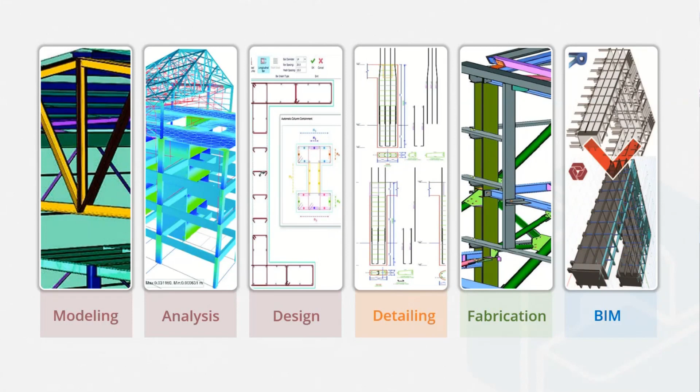So this is our ProtaStructure Enterprise Suite made up of 4 components. On the top left corner, we have ProtaStructure, which is the core system for modeling, analysis, and design of your structures. It is also complemented with ProtaDetails. Once you do your modeling, you can move on to your details part, which is a complete CAD system for automated detailing and drawings. It focuses on concrete detailing and includes a unique design library of calculations for designing things like retaining walls and piles.

And then we've got ProtaSteel, which focuses on steel. It complements your steel design by automating all the steelwork connection design, providing comprehensive steel detailing and automated connection design of your structures. With ProtaSteel, you can also do calculation reports, and it provides your drawings as well. With ProtaBIM, finally, we allow team members to connect with other tools and systems to collaborate better with other members that take part in your project. ProtaBIM allows you to communicate with other BIM platforms and software solutions like Allplan through IFC or ArchiCAD through SAF. You can even send analytical data with SAP and ETABS.

So this is Prota software with numbers, basically. And we've been expanding our reach quite a lot. If you've been joining our previous presentations, you might notice these numbers continuously going up. So we currently stand with having 25 international design codes, and we currently support 10 languages such as Polish, Spanish, Portuguese, Thai, and English.

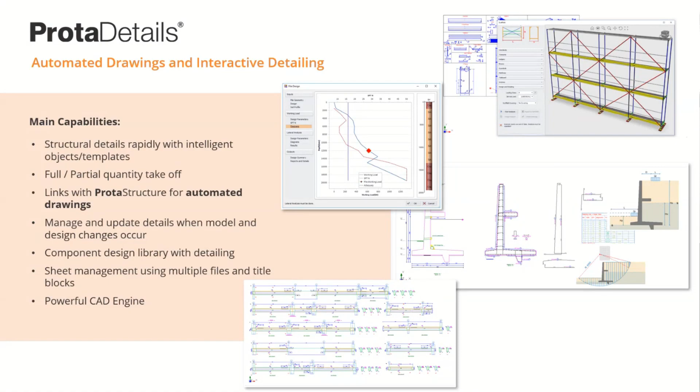Onto ProtaSteel. It is our all-in-one steel detailing solution that allows structural engineers and detailers to perform automated steel connection design and produce high-quality steel detail drawings in just a few minutes. You can take models designed in ProtaStructure and put them directly into ProtaSteel and save hours with automated design of a comprehensive range of bolted, welded steel connections of your choice. Again, we'll get to see that live very soon.

And lastly, ProtaBIM allows engineers to easily create, communicate, and coordinate models with other project stakeholders, including architects, fabricators, BIM specialists, and project owners. Using our own ProtaHub technology, you can easily create models from a range of data formats such as 2D and 3D DXF, IFC, SAF, and Autodesk Revit, as I mentioned before.

Now, you're seeing the ProtaStructure Enterprise Suite on the screen. Overall, if we are to have a recap, the ProtaStructure Suite is developed with BIM in mind. And you should remember that all these solutions are offered in a single economical suite called the ProtaStructure Enterprise Package. We of course have other packages which you can gain further information on through contacting the global sales team, which I'm a member of. But this represents that enterprise package.

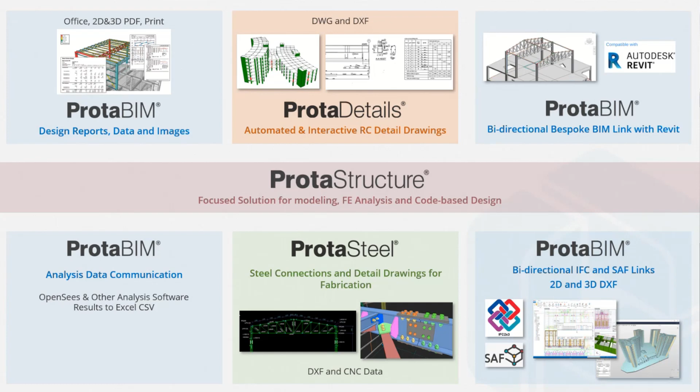You can also transfer and compare your analytical models with other general purpose analysis software, such as ETABS, SAP 2000, OpenSees. And lastly, you can also create and share highly visual calculation reports featuring Microsoft Office and PDF export capabilities.

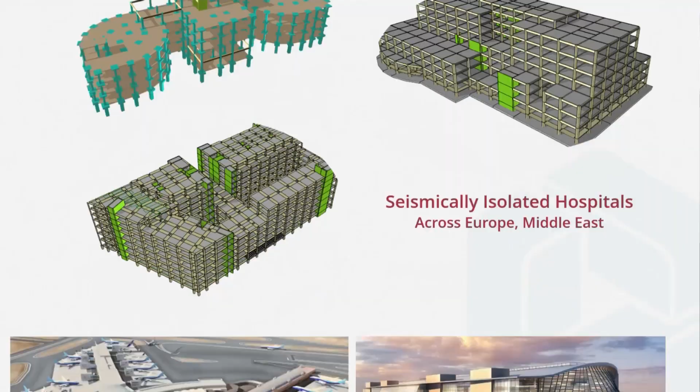Again, a shopping mall in Singapore, among many of the projects that have been completed. A 43-story office building as well, next to the shopping mall. You can see several hospitals on the screen. One worthy note that I must make is that these are hospitals that are seismically isolated buildings. With ProtaStructure's unique seismic capabilities, you can insert seismic isolators on your buildings if you wish to do so. You can see several international airports and train terminals across Russia, Kosovo, Egypt, and Turkey that were delivered using our offerings.

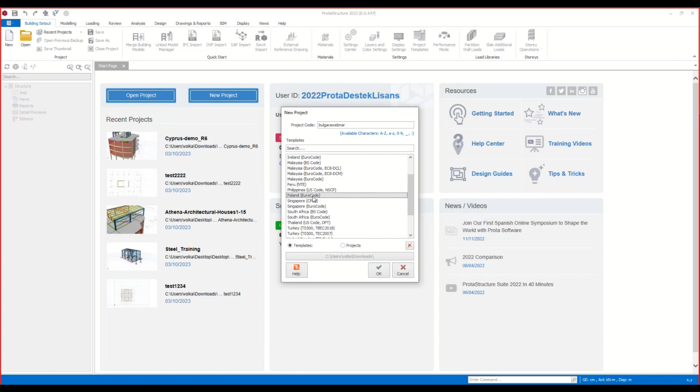So I'm going to create a new project, let's say Bulgaria webinar. You can select any templates in here. We prepared different templates for different territories, because each territory may have different project delivery habits. Of course, you can arrange your own settings and create your own template in ProtaStructure.

There are several ways to start a project in the ProtaStructure environment. You can import 3D DXF, IFC, or you can directly import your architectural plan to the ProtaStructure environment. For instance, let's select a DXF. I have a DXF architectural plan on my desktop. First, I'm going to select this file, and I will pick the correct unit first.

Once you click on the Active button, you will see this plan view as a background. Then we can quickly import members such as grids, columns, walls by clicking the Import button. And all these 2D members will be transformed to 3D elements, just like in the 3D physical model view.

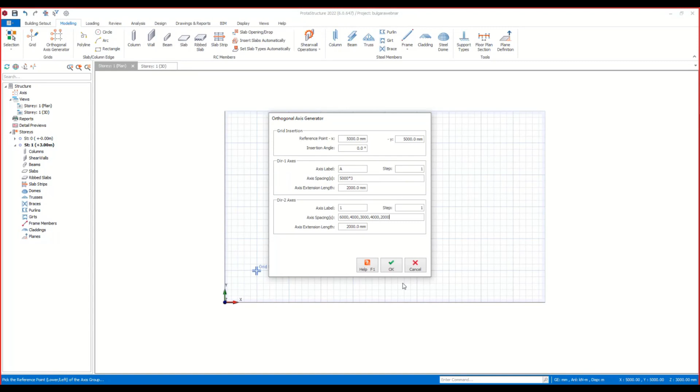Generally, I use this method for starting a project, but in this webinar I would like to show our modeling capabilities. So I'm going to use another method, the orthogonal axis generator, to create a project from scratch. Now I need to insert axis spacings. By the way, let me change the keyboard. Okay. So 6,000, maybe 4,000. You can quickly type in values and click the OK button, and your axis system will be prepared just like this.

Let's say that we have a curved axis over here. I'm going to delete first, and then select the curved axis insertion button to create a curved axis at this place. You can press F2 and specify the curvature distance. You may have any kind of facade, especially lately we see a lot of different architectural designs. So you can use our multi-segment axis insertion to create any kind of axis by just sketching on the screen.

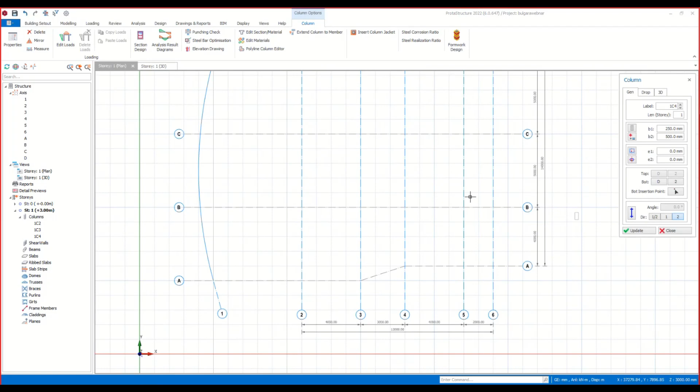After you create the axis system, you can use columns, walls, beams, slabs modeling tools. I'm going to start with the columns. You can specify the column width and height from here. Once you click on the axis intersection, the column will be placed just like this. If you box around the grid system, the columns will be placed automatically on the axis intersections. I'm going to change the column dimensions, and we can align the columns on the curved axis, just like this.

We have a really advanced section manager. You can simply select any kind of section, steel, built-up steel, cold-formed, composite sections from here. I'm going to select the circular one. You can insert the diameter of the circular column. And once you click on the axis intersection, these members will be inserted just like this.

And lastly, let's say that we have an L-shaped column. I'm going to select the section, and we can place it just like this. Of course, you can use the cursor keys to place this column at the exact place that you want. You can slightly move it down. Yeah.

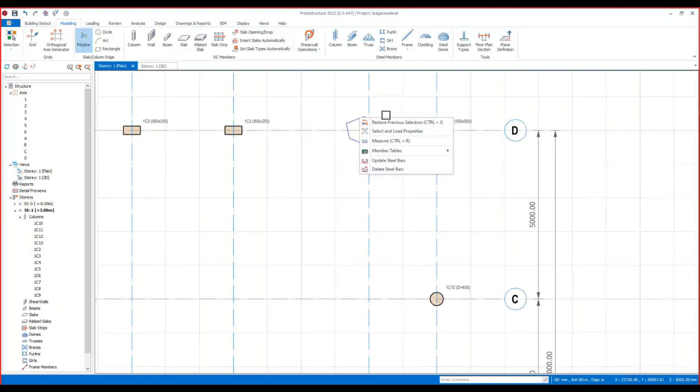Also, you can create any kind of column section in the ProtaStructure environment. For example, let's draw a really weird shape and create this shape as a column. I'm going to select this outer edge and right click. You can quickly convert this section to a column, and then pass to the polyline column editor and prepare our links and bars. If you want, you can insert intermediate bars just like this.

You can quickly insert intermediate bars in seconds. Then I will add some tie bars, for example, just like this. Okay.

And if you need a secondary layer for rebars, you can also create these rebars just like this, and you can design this reinforcement arrangement in this section. Now I'm going to delete this section and I'm going to continue with the shear walls.

So you can simply pick 2 points and you can create your shear wall just like this. You can merge this shear wall by Shearwall Operations, and in seconds you can get into the polyline editor and create your reinforcement just like this.

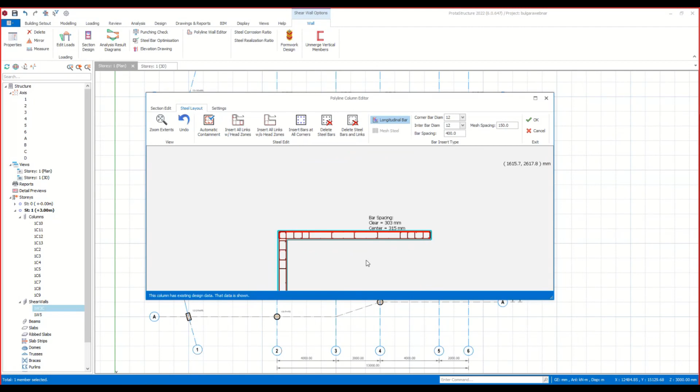For example, let's just insert the intermediate rebar numbers, head zones, okay, and all reinforcement arrangement will be prepared just like this. Of course, if you want, you can unmerge vertical members just like this.

So then I would like to show our beam feature, how you can insert a beam. You can just draw beams along the axis, or you can just box around. As you see, the beams will be automatically split on the column nodes, and there is no problem for the overlapping.

So you can simply create a boxing around the nodes, or you can just tie the vertical members by beams. Of course, if you draw, even if there's a cranked axis, the beam will follow this cranked axis just like this.

So I'm going to also create a curved axis in here, curved beam actually. So you can simply type in the curvature distance, and that's all. You can also tie this part.

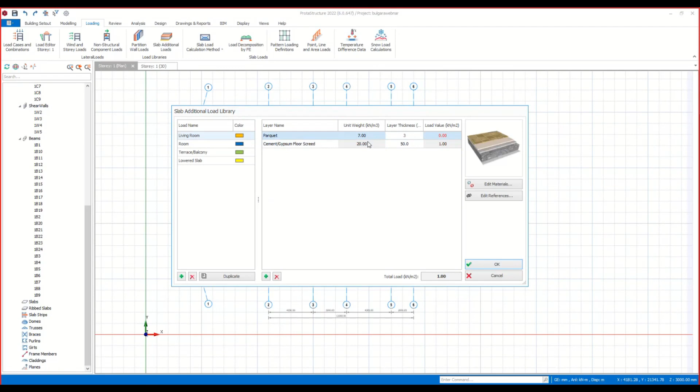I will just add some materials. For example, maybe we may have parquet here, and let's say that we have a screed. You just need to insert the thicknesses, and total load will be automatically determined by the software.

So once you go to the modeling tab and select the slab, you need to prepare the load combinations. You can just select the loadings. Okay, now we didn't select any seismic code, so that's why you will not see seismic loading in here, but later I will just select the proper one.

So now let's just select the load cases, and load combinations will be automatically prepared according to the selected codes. Then I just need to pick a point in the beam region, and as you see, slabs are inserted just like this. By the way, I didn't insert any load.

Of course, you can simply click on the table and you can use this part or additional dead loads from here, like living room and G load case from here. If you want to change any load of the selected slab, you can simply change the dead load from here, or you can right click on the imposed loads, and maybe we can select, for instance, office areas like this.

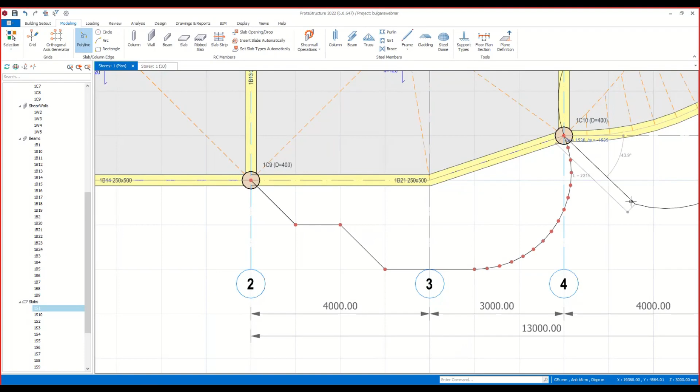I would like to show a bit of cantilever slabs. So you can create any kind of cantilever slab by drawing the edge of it. We can continue with arc. Okay, I'm going to finish it.

Or what we can do, of course, if it's rectangular, it's much easier because we can simply select type 12 and insert the length of the cantilever in here, just like this.

So now we can discuss a bit our wall loads. So first, again, let's go to the loading tab and we can add our own wall loading. For example, 100 millimeter lightweight brick. So I'm going to select only lightweight block from here, and our thickness can be 100 millimeter. Of course, if you want, you can add your own material to the library.

So now what I can do, I can directly go to the edit loads, and I can select my wall load, and here you will see the relevant wall load in here. You can add openings if you want. Once you select the beam member, as you see, the wall load has been inserted. Of course, I'm going to change the wall load to 200 brick wall.

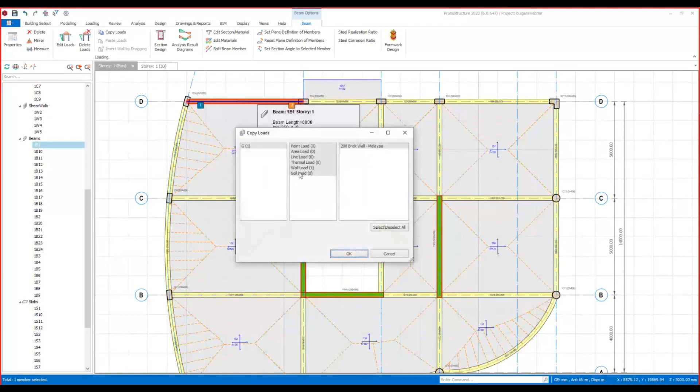Okay. So what I'm going to do, I will just copy this wall load. If you want, you can use the Ctrl+C button, and we can quickly copy these loads to the outer edge of the building.

Just like this. And once you paste it, all wall loads will be actually applied to the other outer edge beams. What you can do, you can simply select beams like this, and let me first create a beam load in here. This time we can use 10 centimeter lightweight brick wall. And then we can quickly copy this wall load and paste to the other selected beams by Ctrl+V button. It's that easy.

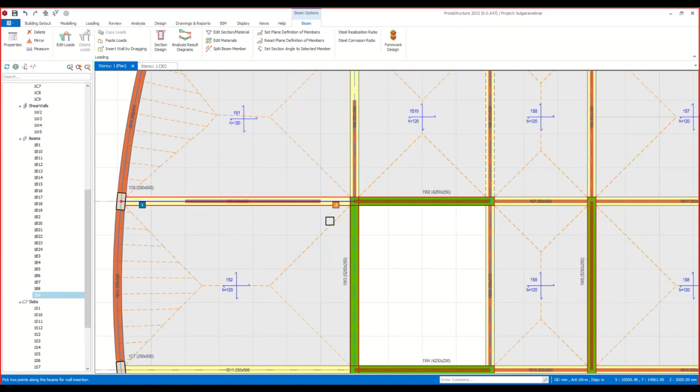You can also select the beam and draw actually a wall load on it, just like this. Especially if you have door opening, it's really useful feature. We can also insert these wall loads on the slabs. So I'm going to select the line loads, and in here, again, I'm going to select our lightweight brick wall load. Height of the wall can be 3 meters, and we can simply draw this wall load in here. By the way, also this kind of partition wall loads will be seen in 3D view as well. You can see over here.

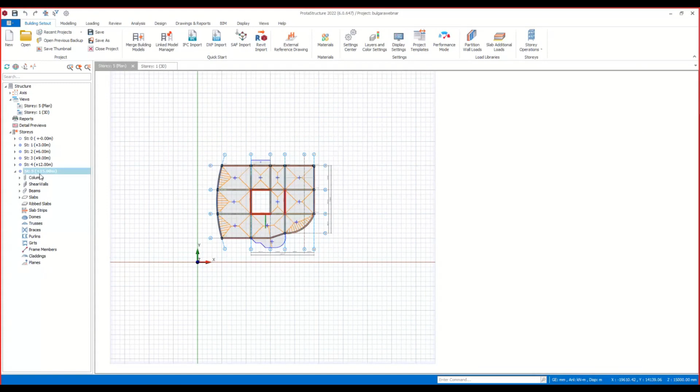So as you see, we have almost completed our first story. So now I would like to copy the story information to the other stories. Let's say that we have a 5-story building, and I'm gonna copy the story information to the other stories by selecting this option. Okay, you can also insert the story heights from here. Then on the 5th story, we will have some steel members. So I'm gonna delete the members in the 5th story. And on the 4th story, I'm planning to create a flat slab system. So that's why I'm gonna delete all beams on the 4th story.

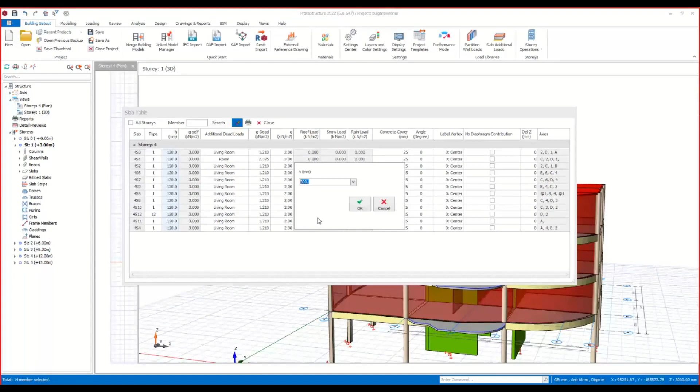You can simply select members and use member filter for deleting the appropriate members. Okay. I'm going to delete also these partition walls by delete loads command. Okay. So now what I'm going to do, I will just select the slab members, and I'm going to use the slab table. So in here, we can quickly increase the thickness of the slabs. Let's say 300 millimeter. So it will be applied to the model instantly. If you want, we can tile the views just like this. Okay.

So now let's add an additional slab over here. Now I would like to add my steel members on the 5th story. So this time I would like to insert these members on 3D, because you can also do some adjustments on 3D view. Let's go to the modeling and select the steel column. Once you get into the section database, you can see that we have plenty of different territories, and you can think that we are supporting 95, maybe 99% of the profile types in the market. We are also providing built-up steel, so you can just fill in the parameters and create your section by these parametric values.

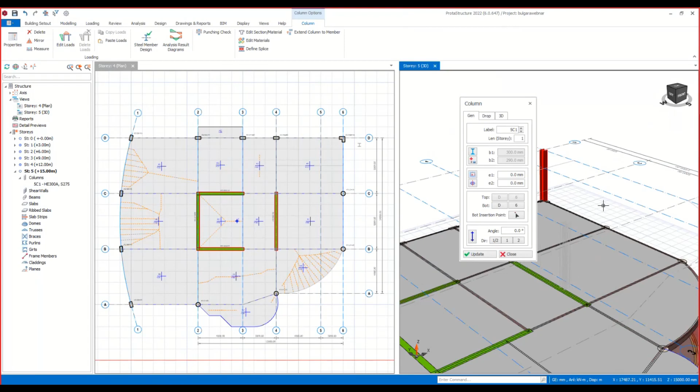So for columns, I'm going to use HEA 300. Okay, if you want, you can rotate the section from here, or you can use side-to-side profiles. So let's just click to the axis intersection. Okay. Then we can continue with the steel beams. So again, let's just click on the beam here. This time I will use IPE 270. Okay. And if you want, you can add hinges on the beam ends. Once you draw along the axis, the beams will be automatically split. Again, I'm going to draw along the axis, and as you see, it's been automatically split just like this.

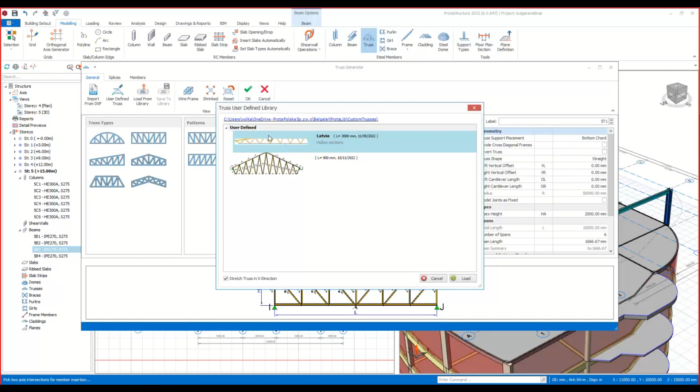Then we can talk about our truss elements. For truss elements, you just need to select columns, and we have our own truss library. Of course, if you want, you can import your own truss from DXF. I already did for Latvia. You can see these user-defined DXFs. Or you can customize our existing trusses. For instance, you can simply draw diagonals or top chord. So as you see, it's such an easy operation in ProtaStructure. So again, this time I will use our existing truss type. You can play with the truss support placement, left vertical offset, right vertical offset, apex height, number of spans, so all can be inserted by the user.

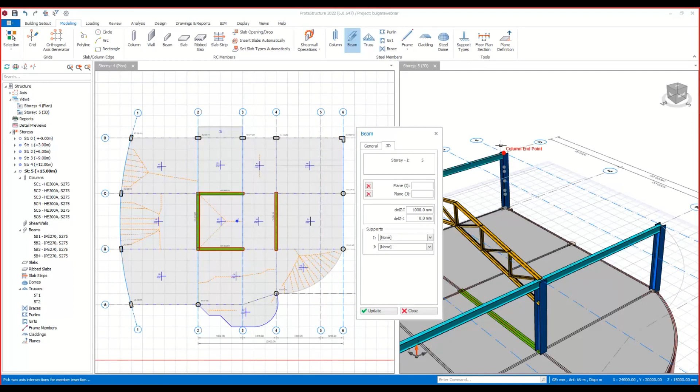Okay. On the last part, I will create beams because at the end I would like to show our apex connection. So that's why I'm going to create a beam over here. So we can simply insert the elevation of the beam. Sorry. Let's just select the steel beam. Okay. As you see, we can quickly, by the way, I'm gonna just cancel the hinge definition. Then let's change the elevation from here.

Okay. So now I can insert my purlins. You can directly select truss members, and you can, for instance, change the first and last member offsets from here. Or, if you want, you can connect these purlins to the truss joints, or you can use by spacing. It's up to you. Okay. I'm gonna do the same on the other side. And that's all.

Now I would like to show how we can add our braces. You just need to select two columns, and if you want, for example, you can increase the counts just like this, or you can change the profile section from here, and let me insert once more.

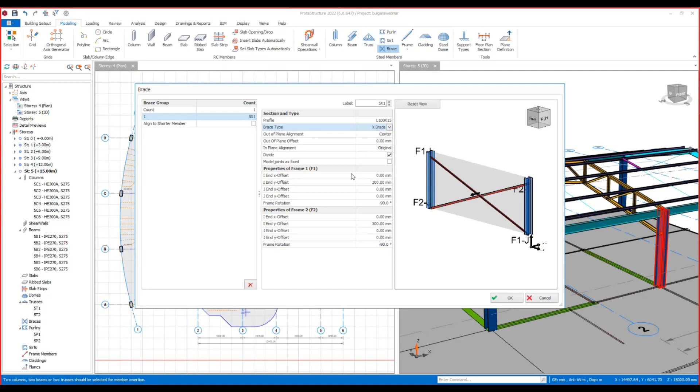We have V brace, K brace, or you can invert them. But in this sample, I'm going to use the X brace option. Of course, if you want, you can change the section. Any circular section can be used. Okay.

So now we can continue with girt members. I'm going to select these columns. Again, you can select the section from here. We have different options. We can use, if you want, side to side, U-shape, it's up to you. But by the way, once you click on profile, you can see the previously used sections.

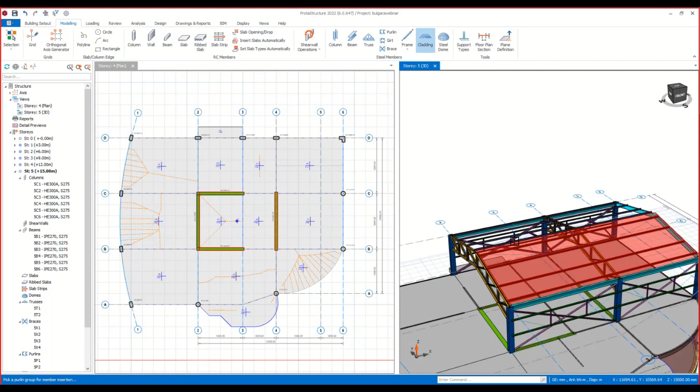Okay, so I'm going to delete the bottom member and insert the purlin just like this. So now let's talk about claddings. Once you select purlin or girt, you can insert claddings. Generally, we use these claddings to be able to insert an area load.

So you can simply select cladding and get into the edit loads interface. And once you select full uniform area load, let's key in the magnitude, and you can insert area loads for each region of this cladding member.

Of course, if you want, you can insert a frame member. So, for example, if you need a curved member, you can simply draw just like this. You can change the angle, let's say 270 degrees or 90 degrees from here. Okay, of course, apex height can be changed from here. So let me delete this

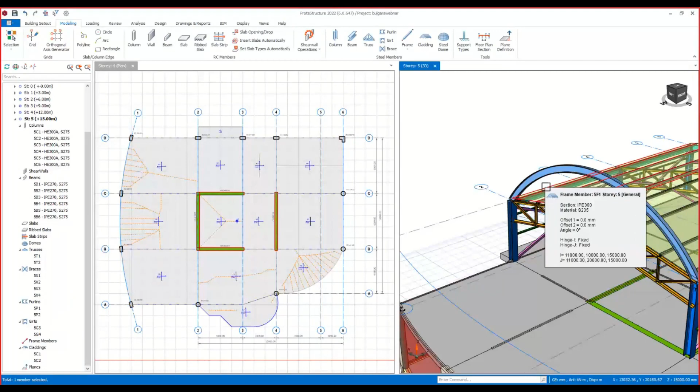curved member. Of course, we have a new feature actually in 2022. You can create steel domes. You just need to insert 2 points, and of course you need to fill the parameters. Once you click OK, the steel dome will be generated. But in my sample, we will not use a steel dome, so that's why I have deleted this member.

Okay, so we almost created our model. Now let's talk about our analysis part. Lastly, I would like to show how you can insert loads. Let's go to the loading tab, and maybe the first story will be better. So I'm going to open the load editor for the first story.

As you see now, it's much easier to insert a soil load. First, I'm going to select the soil load case and select the soil load button. Once you pick the surface of the shear wall, relevant parameters will be loaded. So let's just click the OK button, and it's been applied to the shear wall.

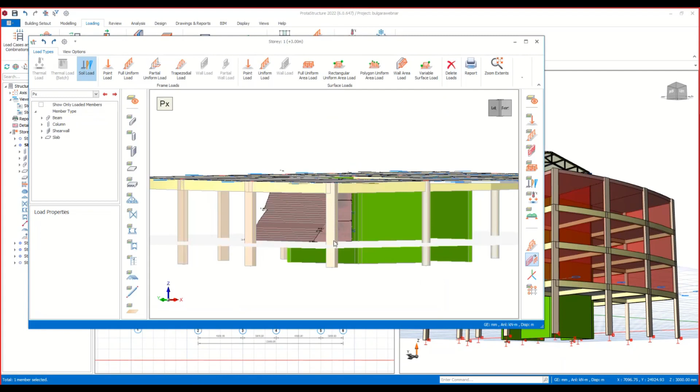If you want, you can Control C and Control V, or you can simply copy and paste this load to the other surfaces, just like this.

So then you can insert point load, full uniform load, polygon uniform area load, rectangular uniform area load. All these kinds of load types can be inserted to frame members or as a surface load to slabs and shear walls. So you can clearly see that our new loading system is much more advanced than previous ones. Okay, let's go to the analysis part.

In here, we can simply assign different materials for all stories. For example, let's create a new story here. For example, first story. Now I will assign C30 for only the first story. Okay, so you can assign any material to the different stories.

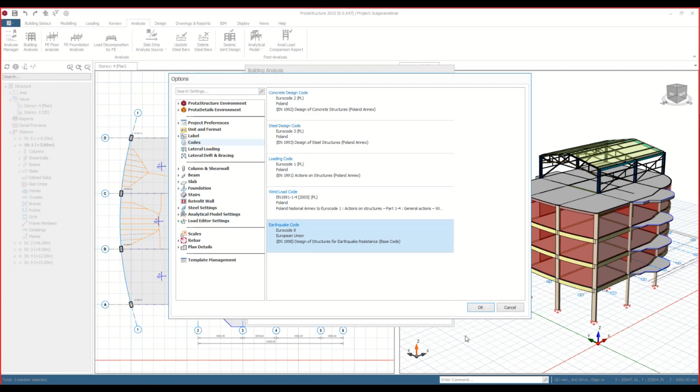So now I'm going to go to the settings center and I will select the earthquake code from here. Of course, if you want, you can change the other codes.

In seismic parameters, you can insert peak reference ground acceleration. For example, let's say for Cyprus, it's around 0.25 G. You can select the ductility level, behavior factors, okay. Prevailing failure mode or importance factor can be inserted from here.

Ground type can be selected. For now, we are using a single behavior factor for both directions, but in the new version, we are planning to add different behavior factors for X and Y direction. Actually, we are already doing this for American and Turkish code, but in 2024, we will also apply it to the Eurocode. You can also insert your own spectrum points if it's necessary.

Let me increase the vibration mode number. So if you have any other structural irregularities, you can mark them from here and they will be plotted on the post-analysis report. Okay, I'm gonna recreate my loading. You can select the seismic loading type from here, and once you click the OK button, the combinations will be prepared according to the selected code. And as you see, this time seismic load combinations are included.

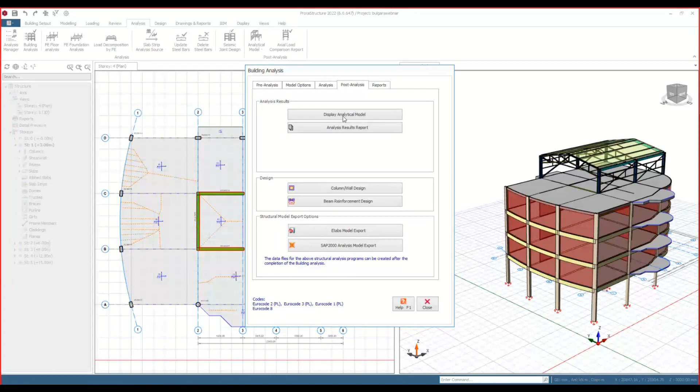Okay, now the software is first calculating the slab loads, then we are converting this physical model to the analytical model, and you'll see the results and also mode numbers, mode shapes. So it's about to be finished. Okay. Once you go to the post-analysis part, you can display the analytical model.

So I'm going to reset the views. As you see, we have created meshes precisely, and they're matching the shear wall nodes as well. So I can say that it's a bit hard for such software which is creating these meshes automatically. You can see the results, for example. I'm gonna activate the animation, and you can see the behavior of the first mode in the X direction.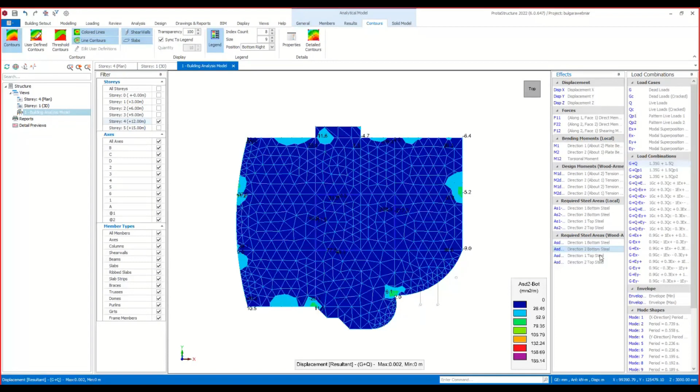If you want, you can review the diagrams. Under gravitational loads, we can review, for example, axial loads, or maybe bending moments. Okay. So if you want to review only a particular story, you can simply select it here, and now we can activate the contours, showing required steel area under load combinations. Of course, if you want, you can select the envelope diagrams. You can clearly see the required steel areas for bottom and top in the X and Y direction here.

So let's talk about the design part. In the design part, we have plenty of different settings. You can play with the steel ratios, rebars. You can select different selection methods. Also, you can use double links, triple links, cross links, and wall confinement. If you want to create end zones for walls, you can select from here.

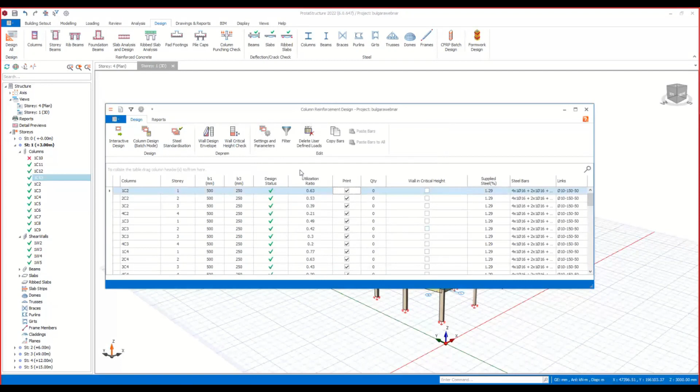You can limit your longitudinal bars, for example. If you want, you can select minimum phi 16 for columns. So all can be customized by the user. Okay. So once you reselect all bars, the arranged settings will be applied to all columns. We can quickly filter failed members if there are any. Let's just check why this member is failing. So as you see, axial load utilization is not satisfied.

So what we can do, we can increase the rebar number and rerun. But as you see, we need to increase the section because it's passing the maximum axial load, so we need to increase the section. So we can clearly see failed members from here. Also, you can create typical details. For instance, you can play with the rebars. Let's say you can increase intermediate bars just like this, and I can copy this rebar arrangement to the other stories which are similar. Okay, it's also an important feature.

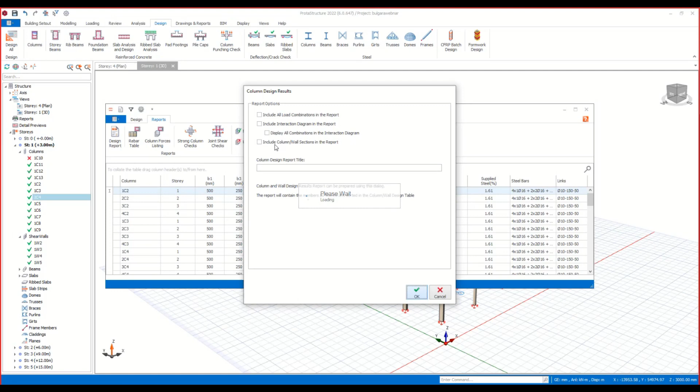Once you go to reports, you can quickly create your design report. If you want, you can add combinations, interaction diagrams, and column wall sections to the report. All reports can be produced in PDF or Word formats. Let's go to the story beams quickly.

Again, I would like to show the settings first because we have plenty of different settings. You can set up the minimum and maximum rebar diameters from here. We have different rebar patterns, for example, bent up patterns, standard patterns. So you can select any pattern from here which is more suitable for you. So let's just click the OK button and select all bars. Of course, if you want, you can group these beam elements, and you can create a single detail for all similar group members.

So here we have grouping option. You can quickly group members from here. Once you click the design report and click OK button, all beam loads, shear force diagrams, moment diagrams, all will be placed in the design report. You can also create bar list, summary table, beam capacity reports.

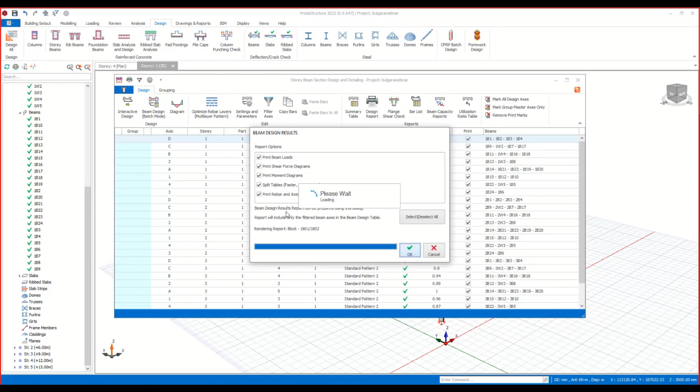It will be ready in a couple of seconds. By the way, we are even preparing the rebar and axis image in the design report. We have so many beam members, so that's why it's taking a bit of time. Okay, as you see, loads, diagrams, bending moments, shear forces, deflection check, and the image of the reinforcement.

So now I would like to talk about our foundation. So let's go to the plan view and let's go to the Storey 0. Storey 0 is our foundation level. First, I'm going to start with the pile caps. I will just select the members and create pile caps for these members. So let's redesign all. As you see, software is automatically designing them. And once you click OK, they will be drawn on the screen.

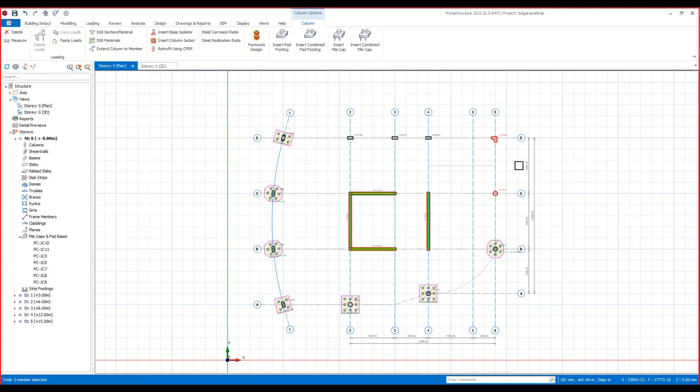We can also add pad footings in a batch mode. I have selected the wrong one again. Okay, our pad footings are ready, and I'm going to continue with another kind of foundation type.

So let's create a beam for this purpose. And we can connect these columns via this beam. Once you select these beams, you can insert a strip footing. I'm going to select the design envelope, and you can, for example, specify the cantilever lengths, footing width. Normally, we are automatically determining the footing width, but if you want, you can increase the footing width from here. Footing depth can be inserted manually. Okay.

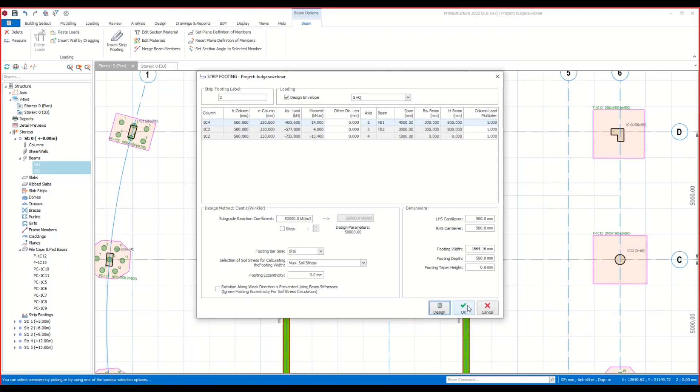And for the core walls, I'm going to create a raft foundation. So we can create a rectangle just like this, and we can insert a slab. We can increase the slab thickness and concrete cover. To be able to obtain reinforcement details, we need to create slab strips. For this purpose, I'm going to use finite element strip and band strip. Okay. We can specify the corners of the slab strip, and it will be ready. I'm going to do the same for the Y direction.

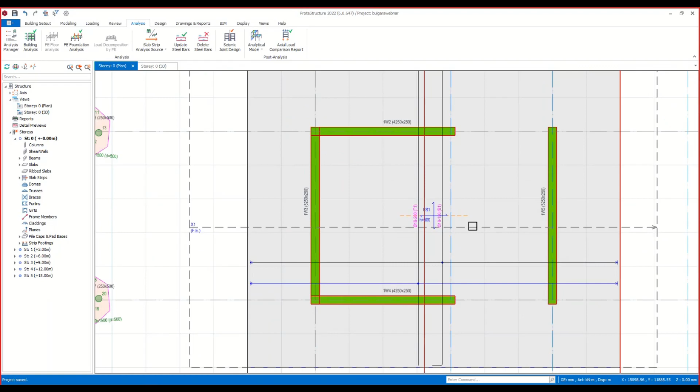Okay. So now we can go to the analysis and run the foundation analysis. In here, you can specify the mesh sizes, and then the software will automatically prepare the analytical model of the finite element mesh system. And once you click OK button, the results will be transferred to the slab strips. If you click on update steel bars, they will be drawn on the slab just like this. You can also update this. Okay.

So now we can talk about slab reinforcement. We have two methods. If you want, you can use analytical method. First you need to select the direction, analytical strip, and boundary conditions are important. So you need to select boundary conditions. And once you draw by pressing Control button, our rebars will be shown instantly.

Of course, if you want, you can use finite element strip. In the first storey, we created meshes, so we already know the finite element results. So analysis results source will be building analysis, and you can create your slab strips just like this. If you have such curved members, I suggest you use finite element method, but of course, it's up to you.

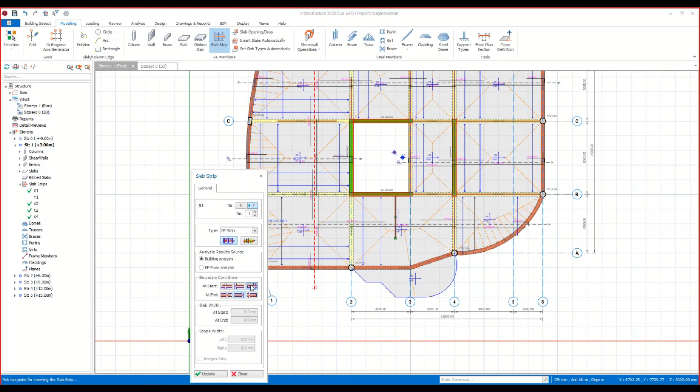If you have cantilevers at the beginning, you can select the first boundary conditions. Okay. And in here, it will be the opposite. Okay. As you see, you can quickly insert analytical strip for this part. It's detecting it as cantilever, so that's why I had to select cantilever at the beginning.

Okay, so as you see, either finite element slab strip or analytical slab strip can be used for the slab design. Once you go to the slab design, you can quickly create your design report from here. Okay, we have almost finished this part.

I just wanted to show report manager. You can combine and merge your reports in here. You can simply drag and drop all reports in here. If you want, you can add a Word file to the report to merge with the ProtaStructure reports. You can use a QR code that includes your license information, or you can use your own logo by this logo command. Any kind of font and font size can be used from here.

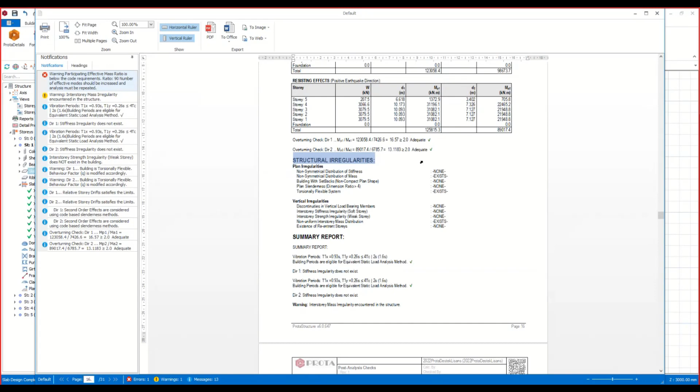Okay, once you click the view button, we are combining these reports, and even you can see the warnings, table of contents. So you can click Control and left click. You can directly go to that part of the report.

Okay, so I would like to pass to Prota Details, which is a magical software that you can create your details with a single click. So once you open Prota Details, there will be two options: you can automatically create all your details, or you can start by creating a new drawing. So I'm going to select the first option.

In here we have different settings. For example, for form plan, I would like to change hatch patterns from here, or if you want, you can add form plan side dimensions. You can insert to sheets. Actually, each different detail has their own settings, so you can do some adjustments by selecting these detail types.

Okay, once you click on the draw button and pick a point on the interface, all details will be prepared by the software automatically. Normally, this process is really painful and time-consuming, but with Prota Details, it will be completed in like 15 seconds.

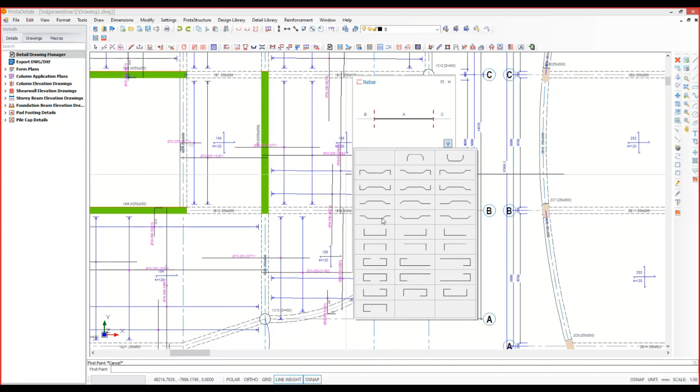You can also draw your own rebars. For example, I can select insert using 4 points. By the way, first you need to select the snap settings. Okay. Then you can quickly draw your own reinforcement in here. For example, let's say that I have such a reinforcement. Okay. Now I need to specify the spacing, and that's all.

It's been created. What I can do, I can play with the segment lengths, for example, 500 millimeter, and for part C, we can also insert 500 millimeter as well. As you see, the segment lengths are customizable, and once you create the quantity table, it will be also considered. Let me show you. You can clearly see the new rebar in the quantity table.

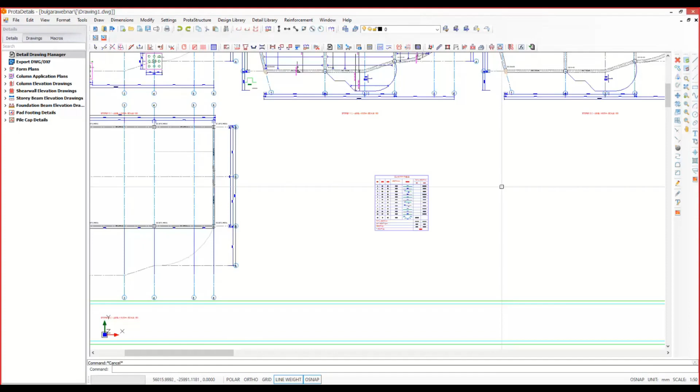Of course, these quantity tables can be added to the reports for PDF, Word, or you can just export this to an Excel file by using CSV. So all these reinforcements are intelligent. You can simply click on the rebar and change the diameters, lengths. It's up to you. You can see our beam details. We are preparing them precisely, and sections. All of them are already dimensioned.

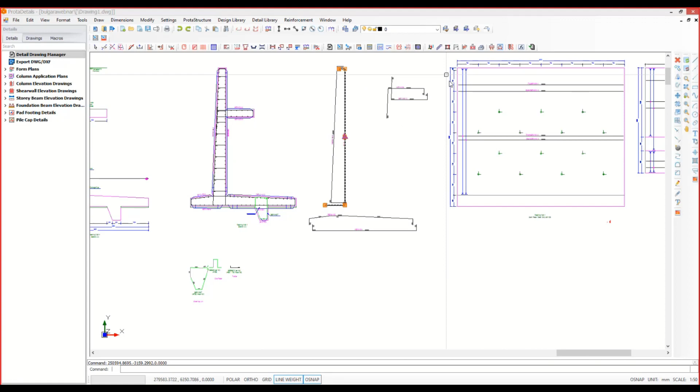Pile caps, okay. So I would like to show, for example, the design library. You can quickly create a cantilever wall. You can add shelf, shear key. We have different code settings. Once you design, okay, you can prepare the drawing, and it's that easy. And by the way, all rebars are intelligent, so you can play with the rebar lengths. Let's insert a sheet.

Of course, if you need, you can add stairs, for example. You just need to fill the parameters, and you can prepare a design report of it. Once you click to detailed drawings, it's ready. By the way, Prota Details is a CAD software, so move, hatch, trim, extend, these kinds of CAD commands are available in the software.

So lastly, I would like to show the ProtaSteel part. We have really advanced tools on the ProtaSteel part. Let's just click the ProtaSteel button. As you see, our model has been transferred to ProtaSteel. Once you double click, if you don't want to see these concrete elements, you can limit the view, for example. I'm gonna limit the view from here.

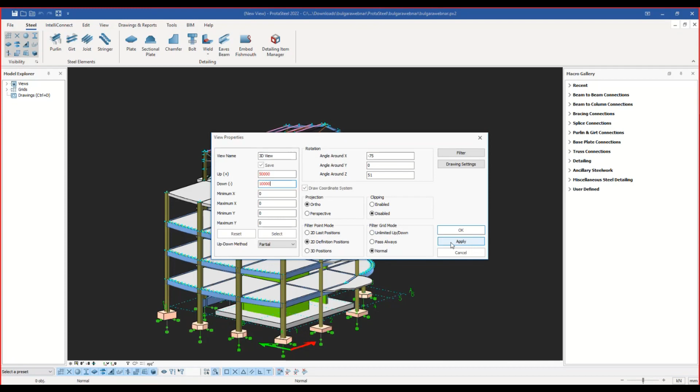And of course, if you want, you can also just filter concrete elements if you don't want to see them here, just like this. But I would like to see them, so I'm going to cancel this operation.

Okay, so let's just start with base plates. Once you select a column member, the base plate will be created. Of course, we have different base plate types, especially for hollow sections. If you want, you can also add a shear key. Okay. Then you can see that we have such a node, especially suitable for haunch connection.

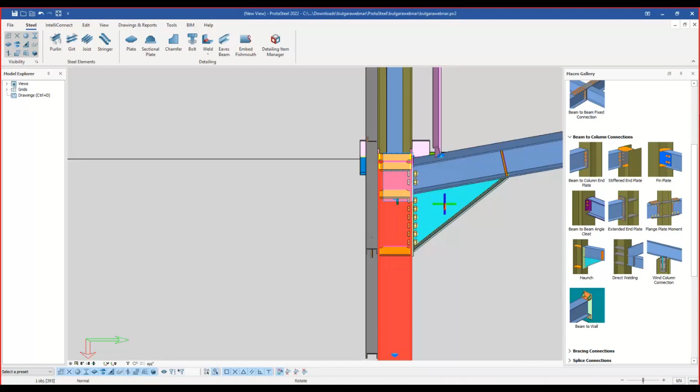So let's go to the beam column connections, and you can select the first primary member, then secondary member. Haunch connection will be inserted. So now I would like to add a stiffened end plate by using our existing stiffeners. For example, let me turn off the... okay. Once you right click, the stiffened end plate connection will be placed just like this.

Of course, if you want, you can also add your brace connection for this node. For example, first main member, then brace, and the member which is limiting this brace element. Okay, just like this. So such a complicated connection can be done in seconds.

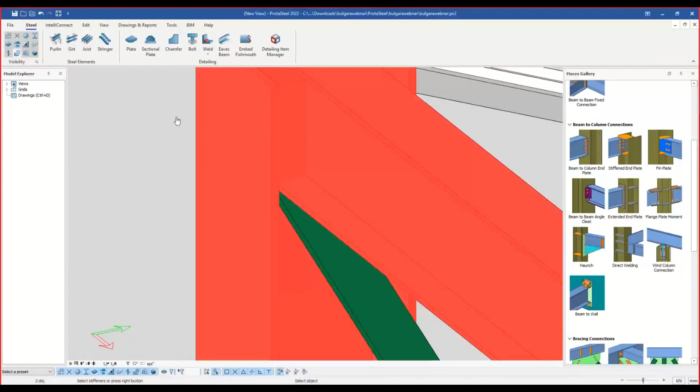Let's add some stiffened end plate connections for the other parts. Okay. We can use this time fin plate connection. By the way, if you need, you can add ancillary steelwork, for example, or some detailing elements. Let's add a stiffener here. Okay. And I can add a brace connection using this stiffener. Okay.

So now let's continue. I'm going to add these gusset plates as well. Okay. So let's continue. By the way, I would like to show some truss connections, but before, we need to increase the column height a bit. These operations can also be done in ProtaSteel, for example, 100 millimeter. We can select other columns and apply the same adjustment by the match element command.

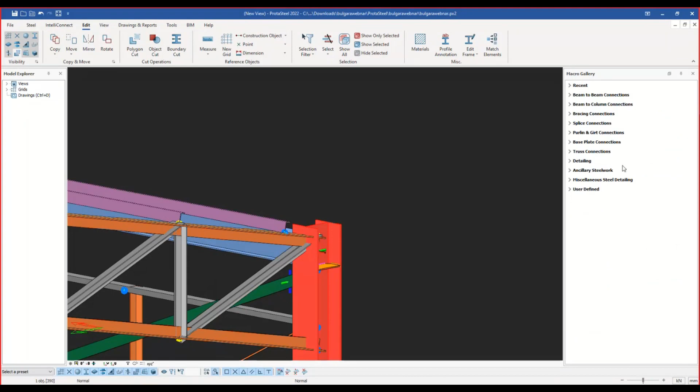So now I would like to add some truss connections. For example, truss end plate with gusset, just like this. If you want, you can do the same on the other side. Of course, there might be some members that can block your views, so you can simply hide these elements. Okay, and I'm gonna do the same for this node. We can also use bracing connections for internal truss nodes, just like this.

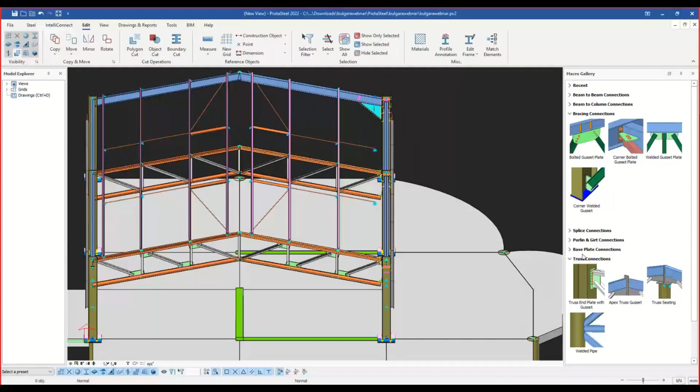I always select first the primary member, in this case bottom chord, then diagonals or verticals. Okay. It's that easy. So what we can do, we can copy this connection and paste to the other side. But before, I would like to add also apex and for the bottom node as well.

So what we can do, we can copy these connections, these macros. So, yeah, I have selected. Okay. So now I would like to copy these elements to the other truss member. And that's all.

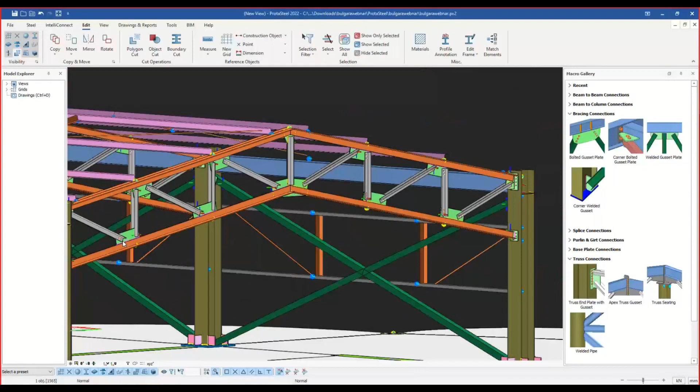By the way, if your structure is symmetrical, you can use a mirror command as well. For example, like this, I just selected connections, and we can use the mirror command just like this. Once you click the run button, it will be applied to the other side. You can clearly see the connections. Okay. So we have an apex connection for this part. We can go to the beam-to-beam connections, apex haunch, and that's all.

Of course, all these connections are customizable, so you can get into the connection properties, and you can play with the parameters just like this. And once you apply, it will be generated on the apex haunch connection. You can also save these macro presets for further usage.

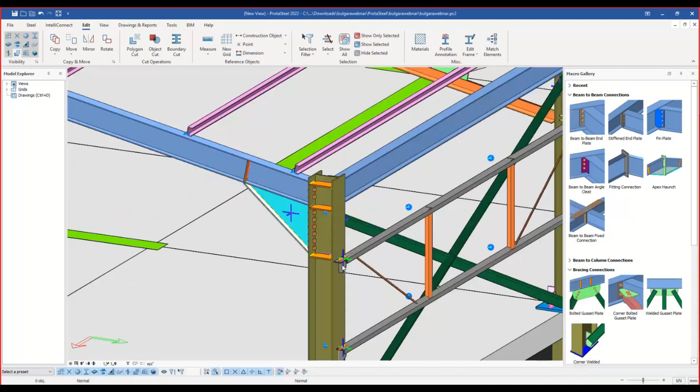Okay, so now I would like to talk about our revolutionary feature, which is IntelliConnect. IntelliConnect is assessing the node and selects the most appropriate connection. For example, let's create girt connections. If you want, you can select a specific connection, or instead the software can select for you. So all girt connections are prepared precisely. You can see over here.

Just like this. So I'm going to create purlin connections. Again, I'm going to use the automatic option, and you can see that our purlins are generated just like this. Of course, there might be some members which are unable to be generated. For this purpose, we have purlin and girt connection types. You can also create these members manually. We have plenty of different connection types.

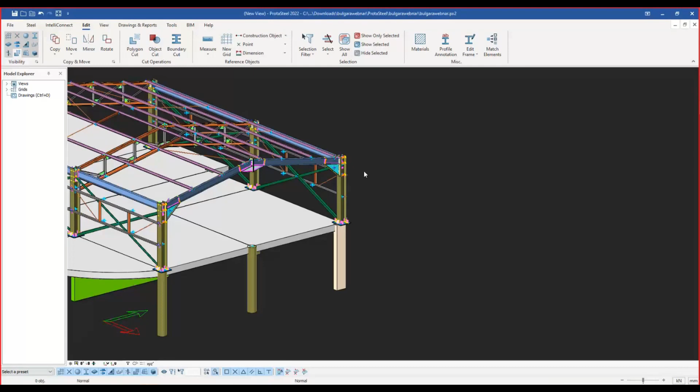So now I would like to talk a bit about detailing. Okay, so for example, let's create a detail cube at this part. What I'm going to do first, I will select the members, and I'm going to create a detail cube by using the detail item manager. So detail A, I'm going to add this. We can select objects that we want to see as the main members in the drawings. So right click. And of course, you can select different perspectives regarding this cube, or you can add a 3D view.

I would like to also create a base plate for this node. Okay. For example, you can simply select the connection and create it with the detailing item manager.

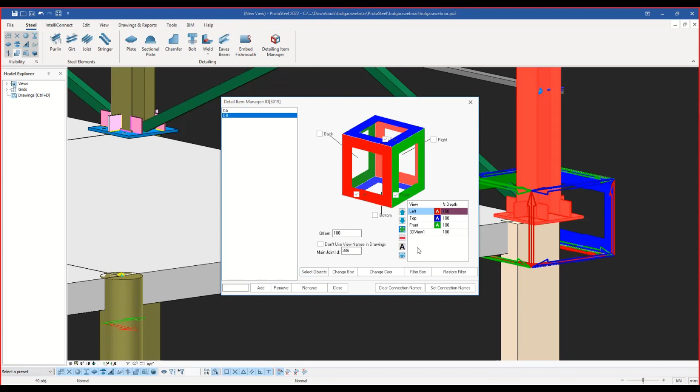Okay. If you want, you can add a 2D view just like this. So also we need to perform numbering to create pos numbers of elements, because we are using these numbers for part and assembly drawings. So it's important to create these numbers before the detailing part.

I would like to also create a 2D view by view button. For example, you can simply select two nodes and the 2D view will be ready just like this. Of course, we can prepare these details automatically as well. For example, if you want, you can simply select the grid system and create the views automatically by using the grid. It's also possible. So what I'm gonna do, I will just cancel the view properties.

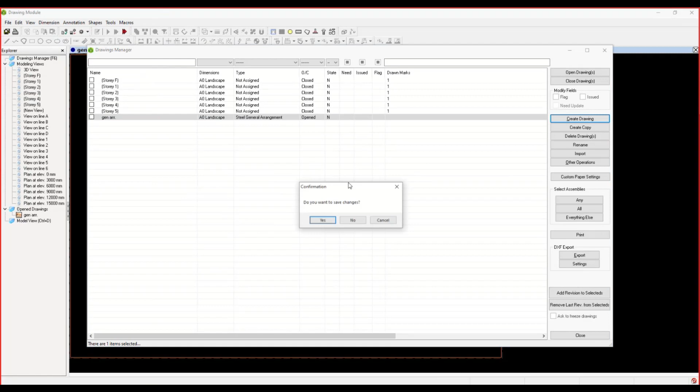So now we can pass to the detailing part. Okay. Once you create a drawing, let's say a general arrangement drawing, here you can create your viewports. Of course, these viewports you can filter. You can change drawing mode, and you can filter some unnecessary elements such as grids in here. You can play with the colors.

So in this case, I just want to see plate, bolt, weld, and profile. Okay. And by using these filtering options, you can optimize the view just like this. If you want, you can add 2D views by using the create viewport command. And once you click detail item cube, all details will be prepared automatically just like this.

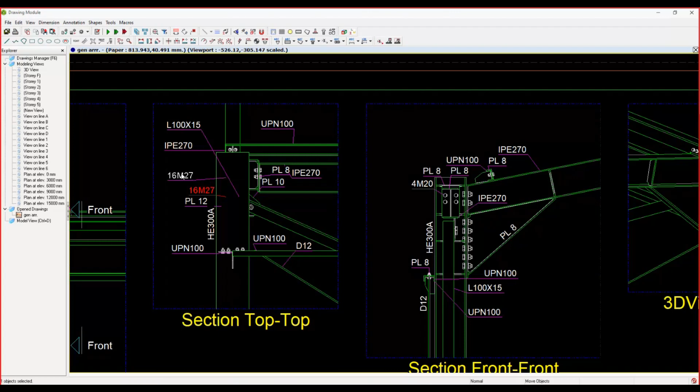You can just place these labels as you want. Okay, so you can customize your drawing like this. If you want, you can change colors, fonts, it's up to you. For example, I would like to see also some annotations on the 3D drawing. So I can select, for example, bolts and label them just like this. You can change the annotation settings from here. For example, instead of diameter, you can add material, assembly, hole. It's up to you.

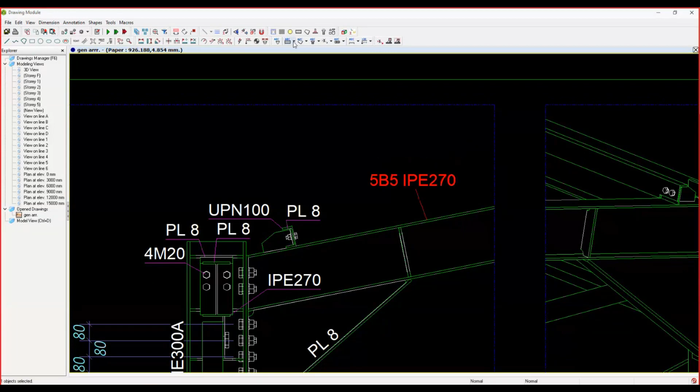You can also add, for example, dimensions simply by clicking just like this. As you see, it's that easy, and you can quickly create dimensions, labelings. For example, we can delete this label, and I'm going to relabel this member. And this time you can see the ProtaStructure label in here. Okay, you can quickly arrange these settings from this part. You can add sections, create different lines, texts, so all of them are available for detailing. So let's just save and cancel.

I'm going to continue with the assembly drawing. So you just need to select the column, right click, create drawings and assembly drawing. So let's press the F6 button. So as you see, these base plate components, steel column, you can see all members which are welded to this column, and here we have the material list. By the way, I can just change the title box place. Okay.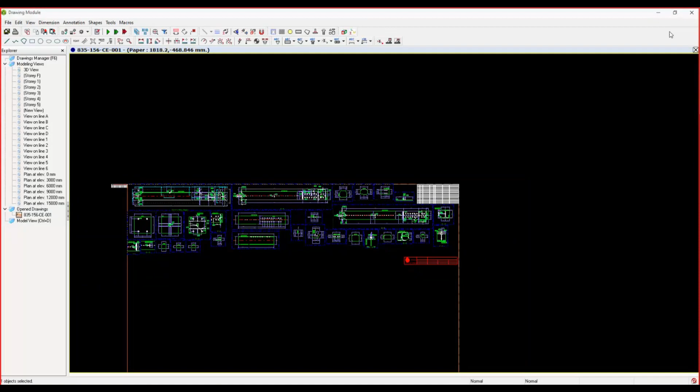You can see the part drawings inside the assembly, and they're all dimensioned. Okay, so we are preparing these drawings precisely. You can also, if you want, prepare the part drawing for the selected element. So in this case, only the column, only the profile will be shown. Okay.

So lastly, I would like to talk about reports. For example, you can simply select the macro, press the M button, and create its report from here. So we have really detailed checks like beam web check, web weld check, flange weld check, stiffener welds, here, and plate checks. So as you see, it's failing, limiting stiffener.

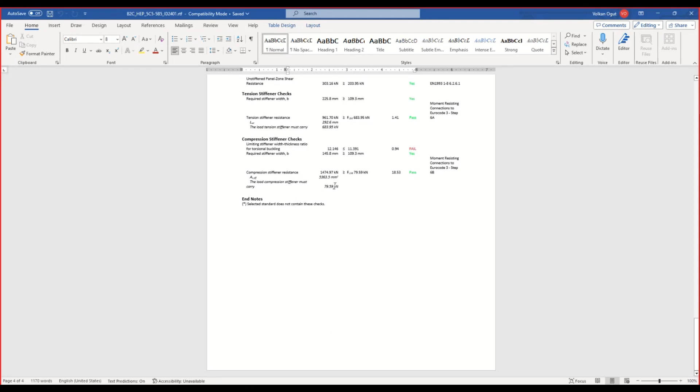So what we can do, we can increase the stiffeners. I don't know the stiffener thickness, but 12. Let's make it 15. By the way, I would like to activate the color coding connection checks. Okay, so in here, because of the haunch connection stiffeners, it's insufficient, so I can increase these stiffener sizes from here. Okay, let's make them all 15. Now it didn't change, but you can increase it till it satisfies.

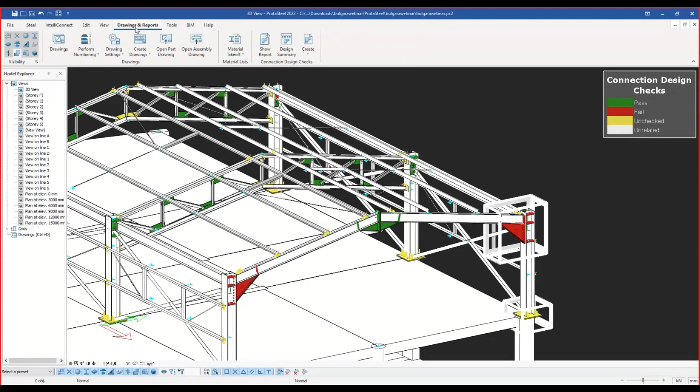Okay. So we are providing these connections by color coding. Here we also have the design summary, so you can also list the failed members in here. So we have 3 connections which are failing. First fin plate, haunch connections.

Then let's talk a bit about the quantity table. We can just select the full steel structure and prepare the material takeoff. So you can see the material plate list, profile list in here. Okay, here the material profile list. You can also prepare a bolt list, or even a washer list from here.

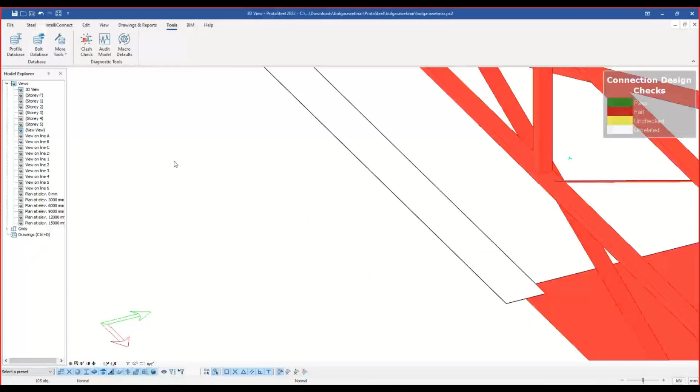Let's go to the tools, because we have really important tools over here. Once you run the clash check, we can clearly see if there are unconnected members. For example, this brace member and plate are colliding with the column. So you can quickly run the clash check and understand where the problem is, or quickly understand if there is any missing connection.

Okay. On the other hand, we can also audit the model. If there's any duplication, for example, we had a duplicated profile, we can simply select these errors and filter them just like this.

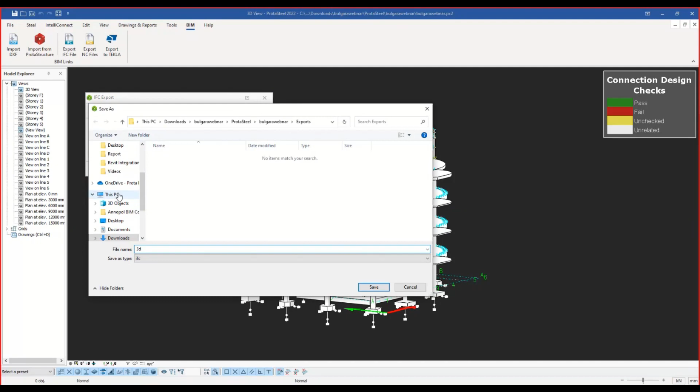In the BIM part, we can share this model with NC files for CNC machines. You can send to Tekla, or you can export the IFC file. For example, 3D. Let's select desktop, and we can. Okay. I can also select some features.

And lastly, I would like to show ProtaBIM. Let's open the Revit file, and at the end we have some samples, real life scenarios. I would like to show them as well. For example, you can share the model quickly with the Revit environment. So of course, first you need to use our template. Otherwise, you have to match the families by yourself, and it may take a bit of time.

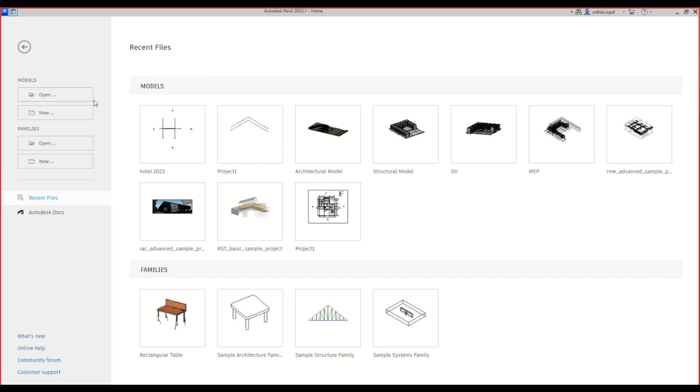So let me create a new file, and in here, I'm going to select my own template. Here in the Prota library folder, we have templates. I'm going to select this. Let's just click OK. You can delete the levels if you want.

So let's just select ProtaBIM 2022, and I'm going to import my model from ProtaStructure. So I have the Revit integration model, a sample model for Revit. Okay, let's just click the next button, start. In this interface, we need to match the ProtaStructure and Revit families. And in our case, all of them are already matched. And once you click the start button, all these members will be transferred to the Revit environment.

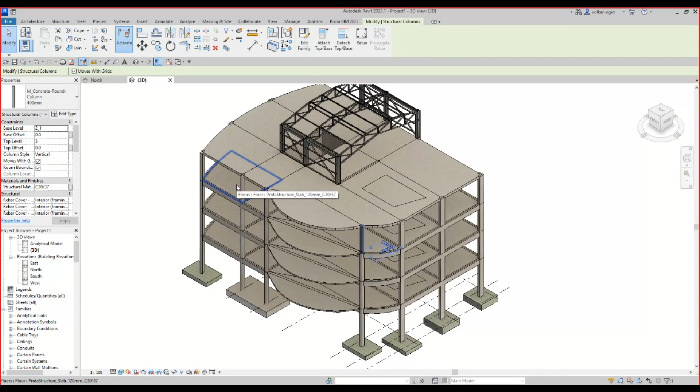So let's just create a 3D view. And we can change the render types. Okay, here, as you see, even this kind of model can be transferred to Revit. And these are not only dummy members. All these elements are created by families. So you can add parameters, you can add any value. Generally in the BIM sector, especially for structural projects, this is the model that people are looking for.

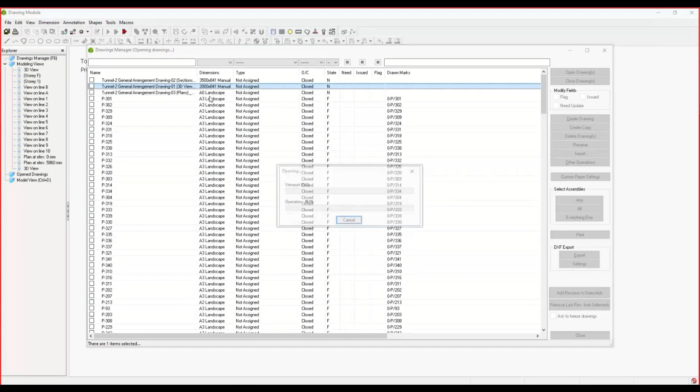I would like to show the drawing results, which were actually approved by authorities. So let me open the drawings. For example, I would like to show first the 3D view and connection details. We have so many members, so it can take a bit of time, a couple seconds, that's all. So in here, you can see our 3D model. Let me turn off this table.

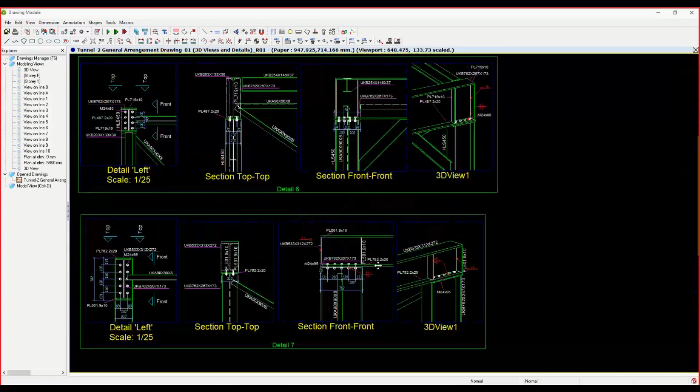You can see detail numbers, and each detail is provided in here. You can add dimensions, for example, splice connections in here, or end plate connections, brace connections, lateral brace connections in here. You have different kinds of haunch. Okay, so as you see, this kind of complicated detail can be prepared in ProtaSteel.

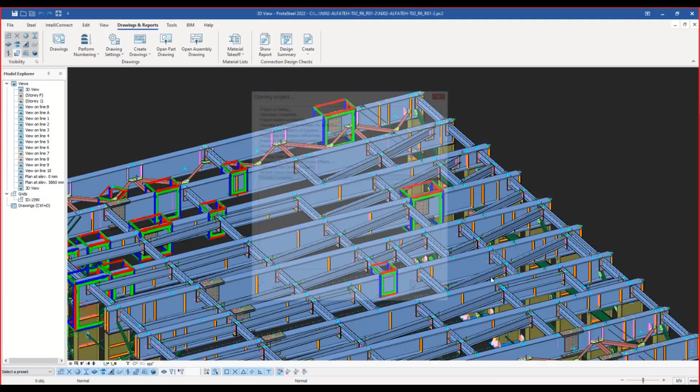And that's all. Lastly, I would like to show a couple ProtaStructure concrete samples as well. For example, this one. So, one of the most reputable banks' headquarters. You can insert even such complicated projects in ProtaStructure. That's why I'm showing these samples, to encourage you. For example, in this case, we have steel members and concrete members together. They are modeled together actually. And this is a campus building.

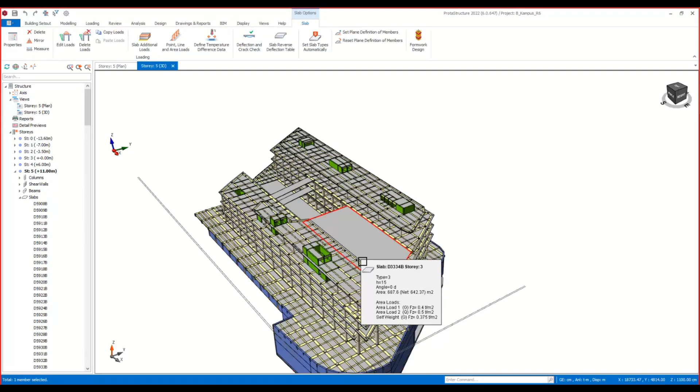For example, even this kind of complicated building can be modeled in ProtaStructure. Here, these slabs are just used to take the load of the steel areas. So that's why. But as you see, we don't have any maximum element limit or something like this. Okay. Lastly, I would like to open this one. It's also one of the banks' headquarters in the Istanbul Finance Center. Okay, just like this.